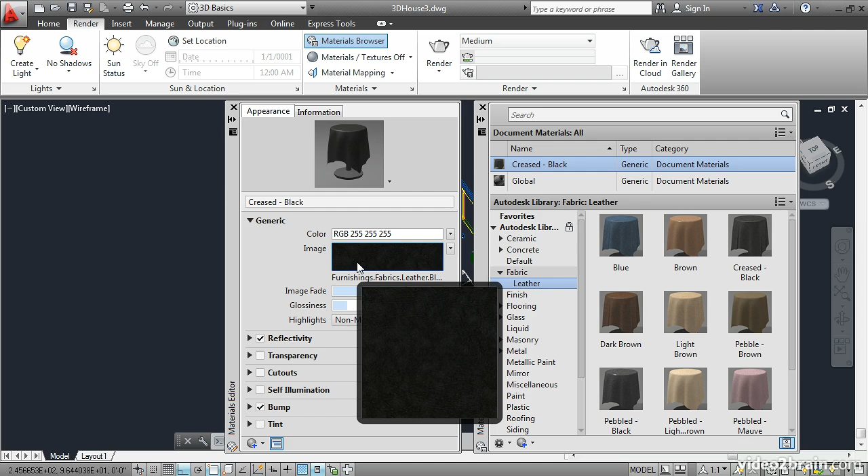That opens up the separate Materials Editor palette, which gives you a preview of the image being assigned to this material. The material is a description of the surface of the solid object or surface object that you've modeled in AutoCAD. We will use this material description in conjunction with light to ultimately create a rendering or photorealistic view of the space.

So let's go ahead and add additional materials in anticipation of all of the different kinds of surfaces we have in this project.

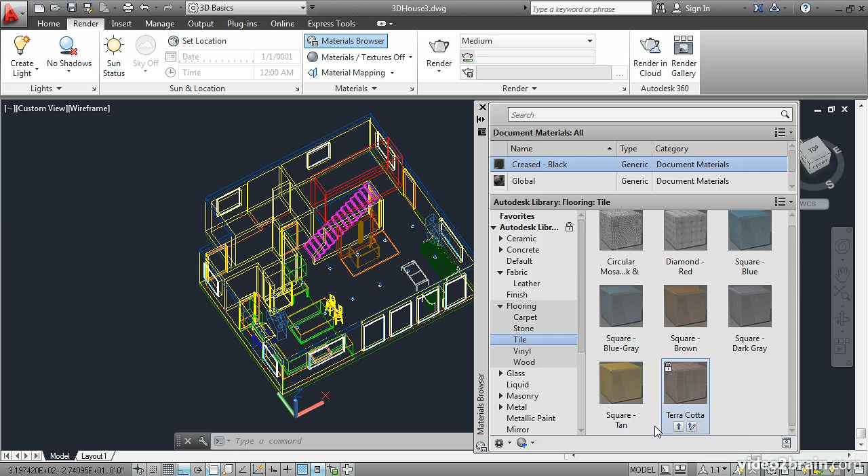Let's go to Flooring, Tile, and add Terra Cotta. This time I'll click Add Material to Document, and it won't open up the editor, but I can see that it's loaded right here in this list.

Next, go to Flooring Wood and select one of the wood materials. Feel free to make your own selections; I'm just going to select my own choices here. Perhaps I'll use a maple of some kind. Here's a silver maple brown. I'll use that for the hardwood floor.

We also need some glass. Just some clear glass will do.

We will need some brick for the brick wall behind the wood stove here. I'll use this pattern and add it to the document.

Then scroll down. Under metal, we'll need some shiny metal for the frames of this sofa and coffee table and armchair. I don't want it to be exactly chrome, but I want it to be reflective.

I'll use this satin metal.

Metallic paint we'll need for the wood stove itself. I'll use a black, not glossy, but satin.

Note that there's a paint category, but there's also, more specifically, a wall paint category. Let's use that, and we can choose from glossy or matte. I'll use a matte color.

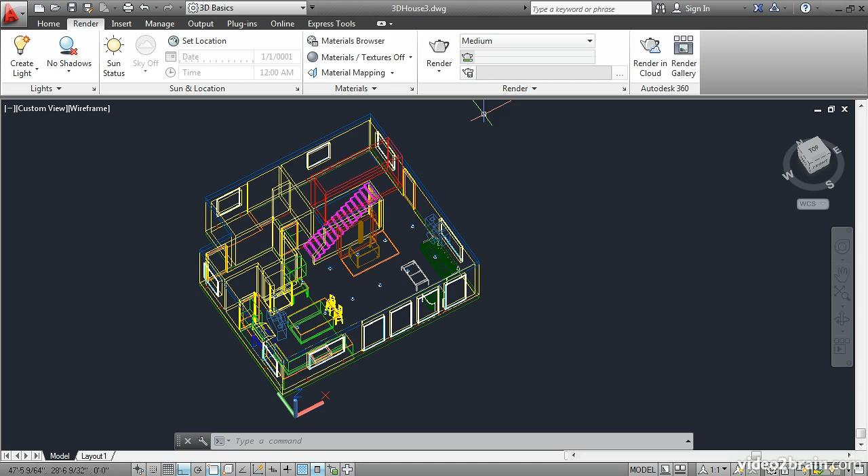I'll close the browser, expand the Materials slide out, and choose Attach by Layer. This opens up a dialog box listing all of the materials that I just loaded, and over here, all of the layers. You make an assignment by dragging a material across the dialog box and dropping it in this box.

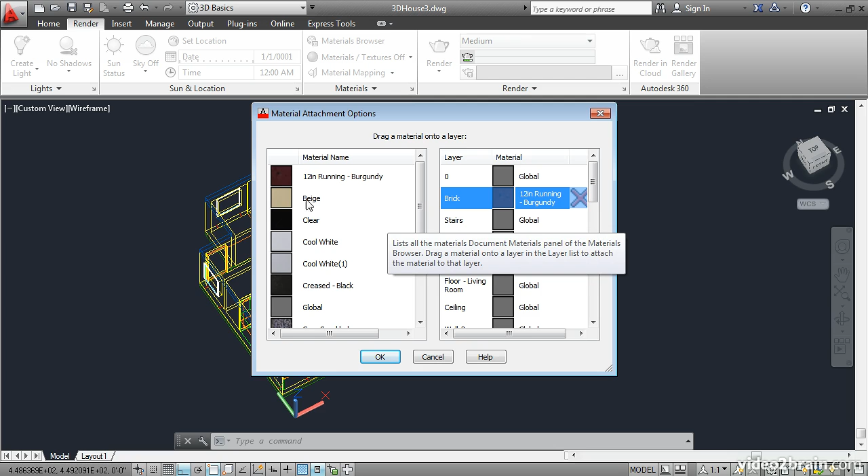If you want to remove that material, you can click here. So I'll just go ahead and drag certain materials across and assign them to layers.

I'd like a lighter wood for the cabinets, so I'll go ahead and click OK and go back to the browser and look for another wood.

I'll use this material here, add it to the document, and then go back and attach by layer. So this process is really a lot of back and forth, looking for a material and then bringing it in here and assigning it to your layer.

I'll just keep going, assigning things. And of course, after you make a test rendering, you can change your mind and come back in here and change a material assignment.

So it's not exactly carved in stone, it's very flexible. You can keep working at this until you create the look that you want in the space.

I'll just keep going. Equipment, this is going to be the wood stove. I need a satin black paint for that.

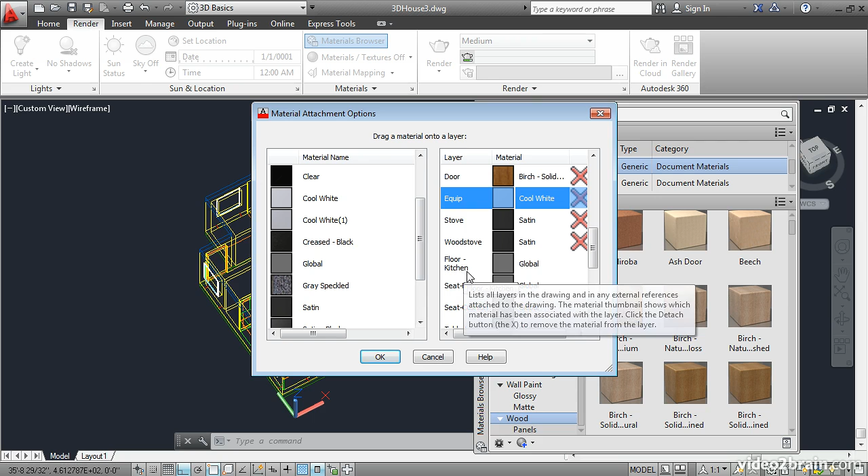The kitchen floor needs a material. So I'll go back over here and look at the flooring category. Let's look for tile.

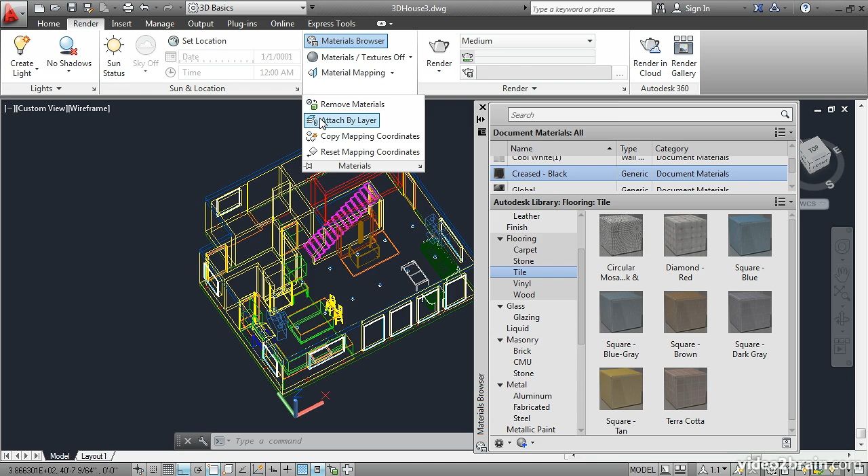How about this square brown material? We'll try that. Go back, attach by layer. There's the material, and there's the layer, so drag across.

The seat frame is going to be that metal. I think that was satin black here.

The seat cushion will be that leather, creased black.

The table legs will be that satin black metal again. The glass is clear.

The stool will be a wood. Downlights are cool white. The counter is the granite, gray speckled. The sink is some kind of metal.

The A-walls layer I'm going to ignore because that's a two-dimensional layer. It won't take a material anyway.

The 3D walls layer needs the beige material. And there, I think I've completed the material assignments.

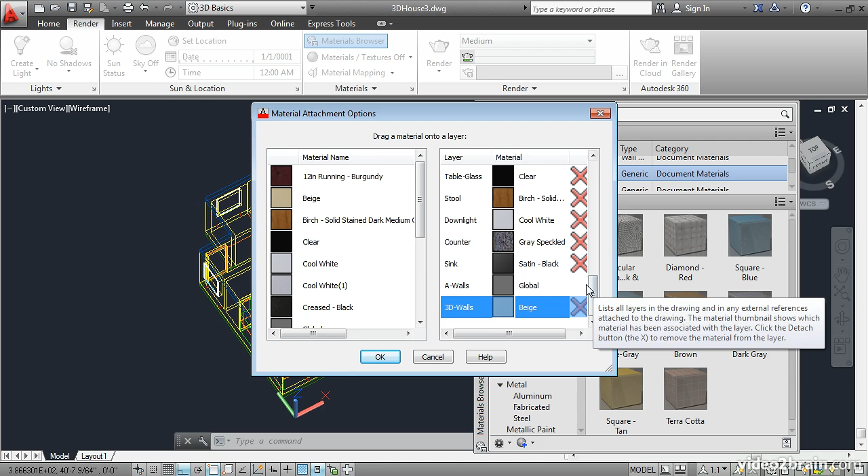I'll click OK, close the materials browser, and let's look through one of the cameras. Type V, enter, double-click on View from Kitchen, OK, and then change the visual style to realistic.

This will give you a rough preview of what the materials look like on screen.

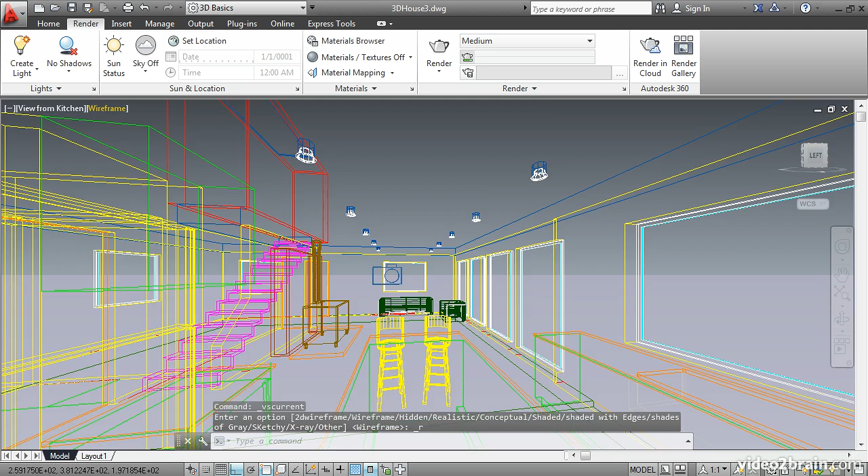So in this lesson, you learned how to select materials from a library and load them into the current drawing. You then assigned these materials to the layers of the model and previewed them on screen.